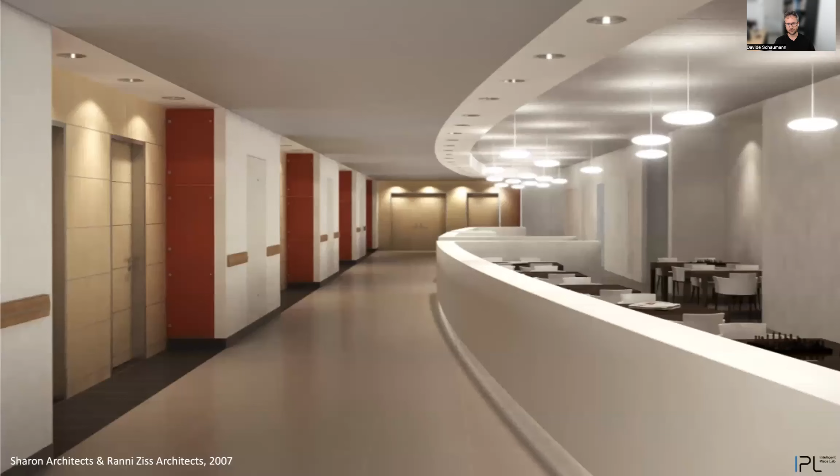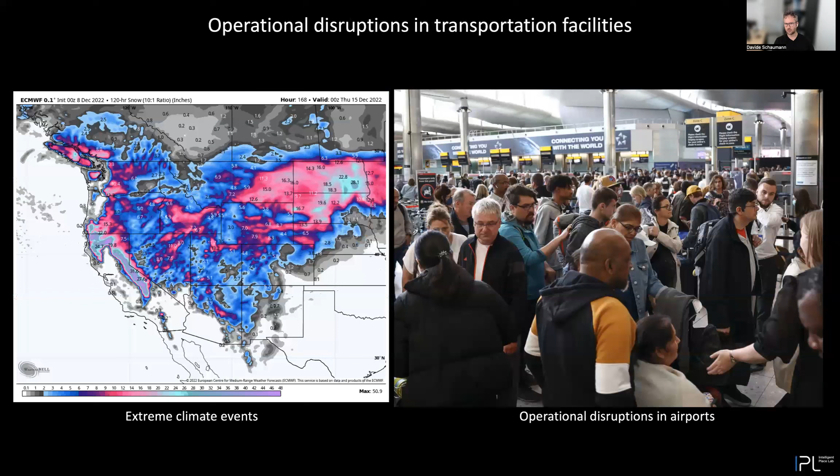This is not only pertinent to hospitals. In office spaces, for example, COVID created a fast transition towards work from everywhere. So it creates major occupancy fluctuation in offices, which are heavily underutilized at the moment. Extreme climate change events are also impacting buildings by creating operational disruptions, for example, in transportation facilities, such as airports. So the question I ask is, how can we design environments that meet ever-changing people's needs?

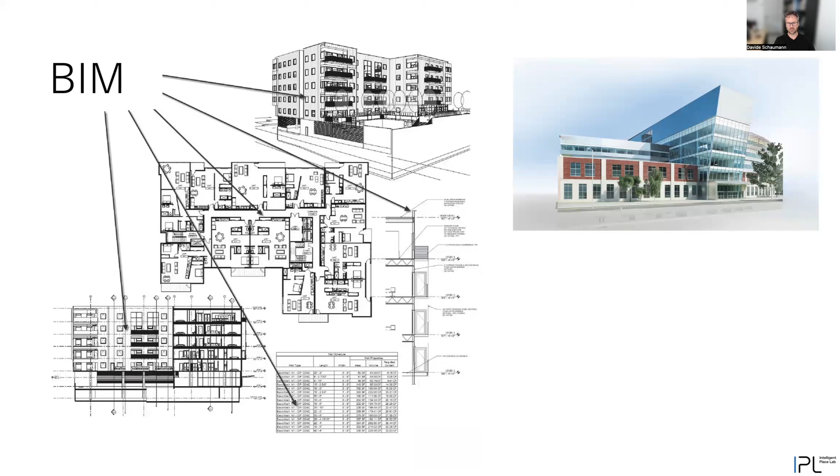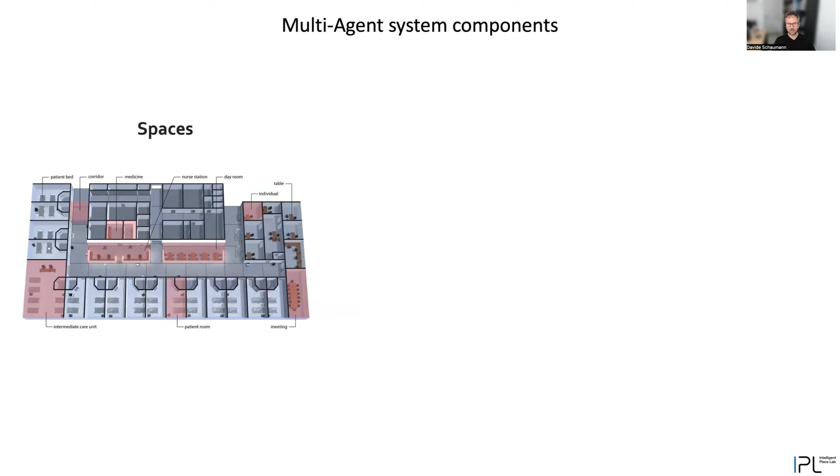Building information modeling is the go-to standard in representation in the architectural world. You have an integrated representation, which encompasses all the physical aspects of the building, but it is not representing the human in the building, the occupants. So what I advocate as a solution is to model not only the spaces, but also the people, the occupants, and the activities they do. Each one of these modeling domains comes from a different world of architecture, social science, and operational research, and industrial engineering.

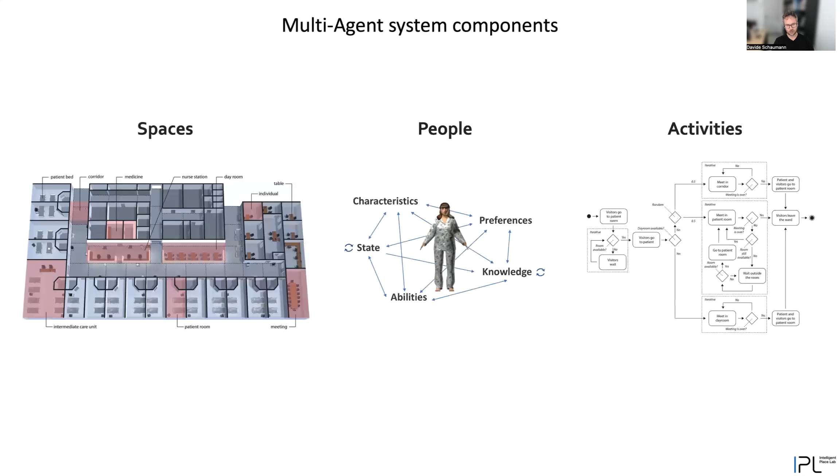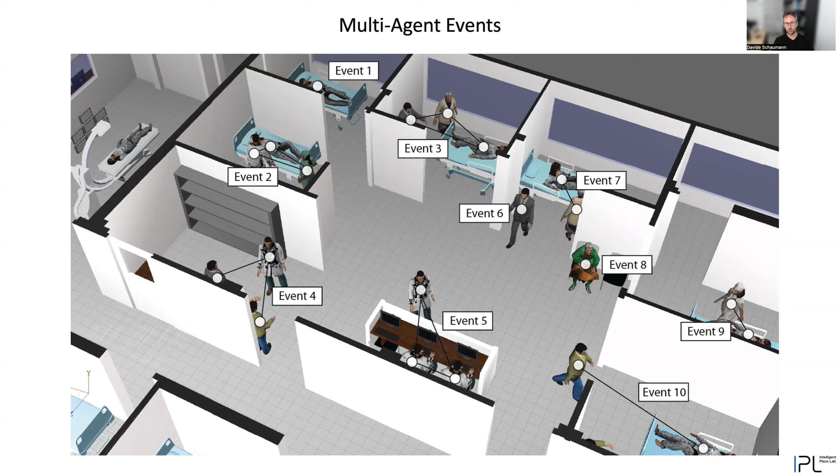So these worlds need to be combined to have an integrated representation of human behavior in built environments using a multi-agent system where each agent is able to interact with other agents and within a virtual environment to carry out their goals. So agents are participating in narratives according to their roles. Their narratives are a sequence of events that basically occur in a building, which represent their use scenarios. So these narratives can be simulated in a virtual world.

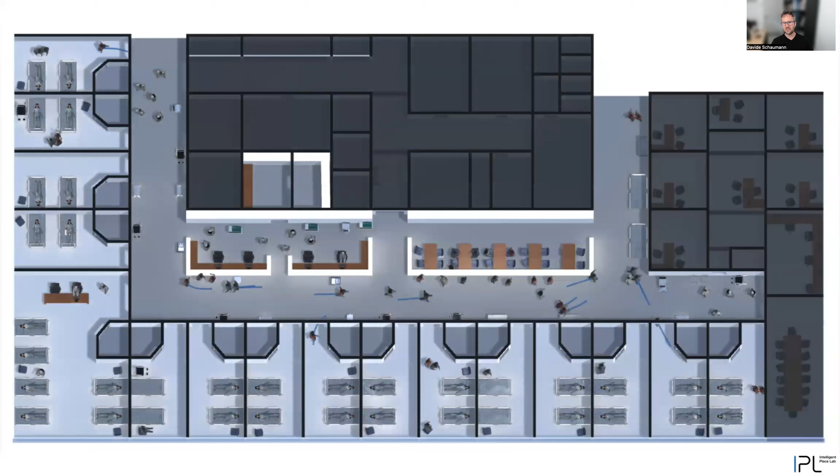For example, this is a hospital facility. You can see here that on the bottom right, you have doctors and nurses doing a scheduled patient check round, but also visitors may come in at random times. And you see here visitors coming in, but when the medical staff come in, the visitor needs to leave. So there are a lot of social situations and interactions which are accounted for in this simulation.

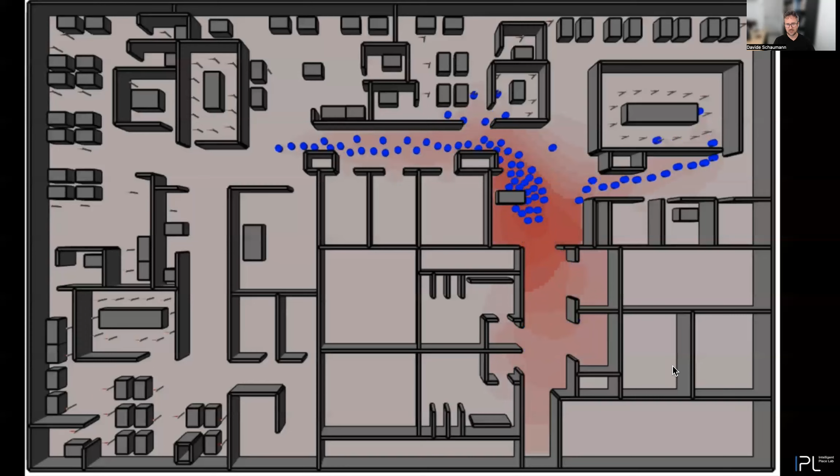Multi-agent simulation can also be coupled with other simulations, such as thermal simulation. So here you have a simulation of the heat in the building caused by the heat that the body generates. So you have a simulation of heat, a simulation of comfort of the occupants, and if the heat surpasses a limit, the occupants may decide to change their behavior, such as leave a room or turn on the HVAC system. So this is called co-simulation because you have a simulation of temperature, decision-making, comfort, and even the movement of people in the buildings.

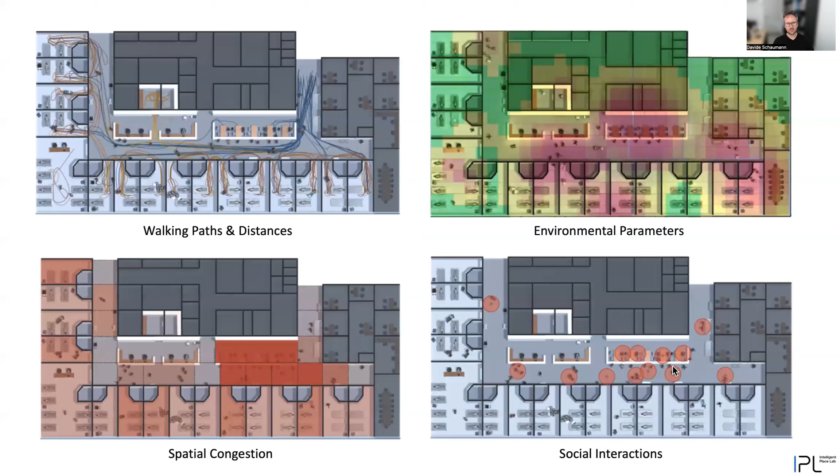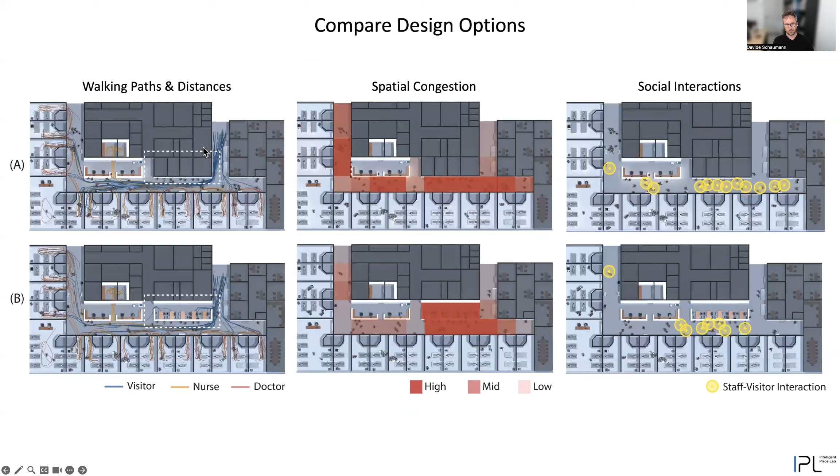So these types of tools can help optimize the building design. So at the design stage, architects can analyze walking paths and distances, environmental parameters, spatial congestion, social interaction, etc. And they can also compare design options. They can say, for example, in the bottom option, there is a day room for social interaction, which is not present in the upper option. So you can simulate the differences and see how this affects the behavior of the occupants. So far, we're focused on optimizing the building design.

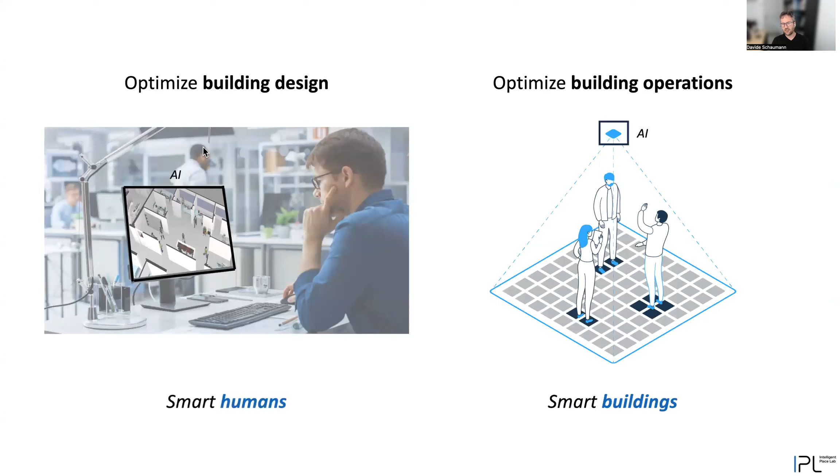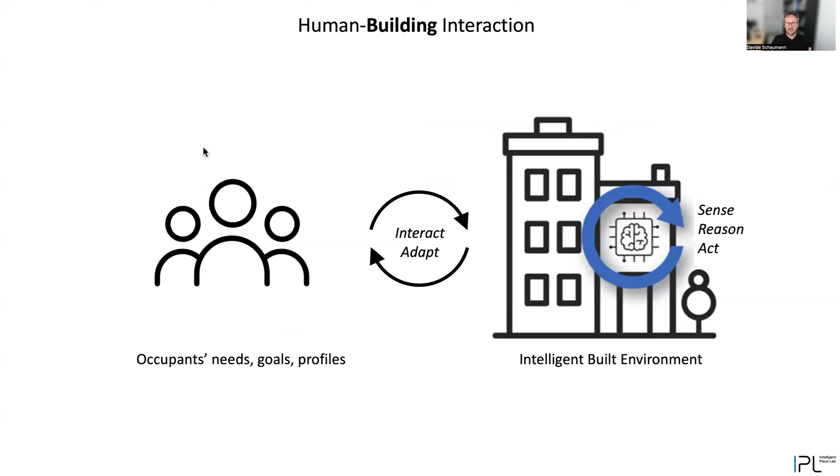So artificial intelligence is used to model synthetic agents that simulate the behavior of real agents. But these AI tools can also be incorporated into the building itself so that we can optimize building operation after a building is designed and in use. So in this case, on the left-hand side, we have smart humans that make decisions at the design phase. And on the right-hand side, we have smart buildings that optimize the operation of buildings. This is a paradigm shift in the field because buildings are becoming intelligent. They're able to sense, reason, act, and interact and adapt dynamically to the needs of the occupants.

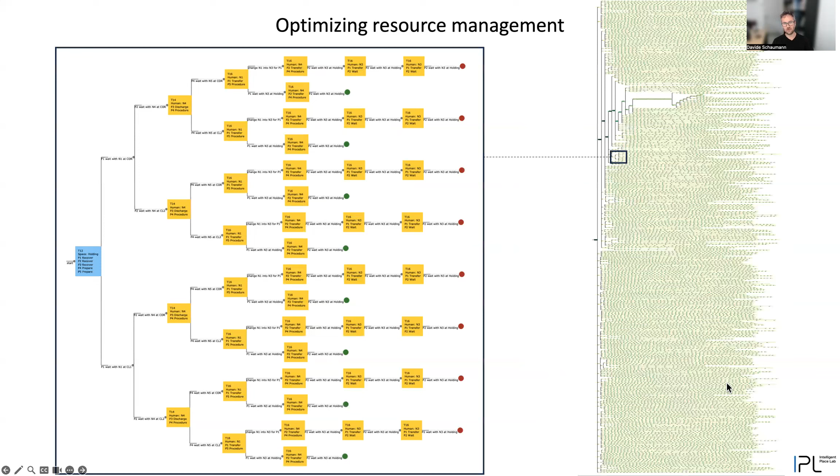So what can buildings do? They can, for example, simulate a different allocation of resources, such as building spaces, and optimize the way buildings are currently used so that you can optimize environmental factors, but also comfort and operational efficiency. This is a scenario where the building simulates future resource allocation scenarios. This is a sequential decision-making process because the moment you allocate resources in a position, you may create further conflicts in the future. So you need to simulate all kinds of options, up into the far future, to see if they do not create conflicts. This is an optimal resource allocation strategy, for example, but it's just an example because in reality, the building needs to simulate hundreds of thousands of options. This is a very complicated process.

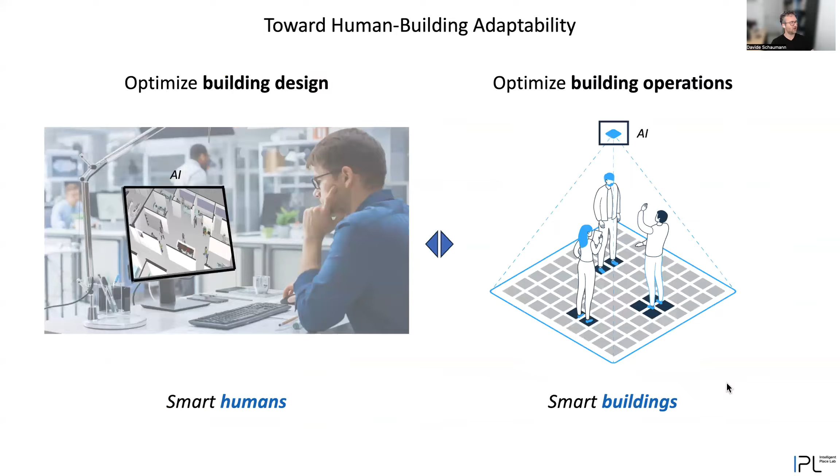So what I advocate in order to get towards human building convergence is to merge an approach of optimized building design made by smart humans with optimized building operation enabled by smart buildings. So in order to do so, we need three things: artificial intelligence systems to inform decision-making, integrated facility design and operation, and the convergent goal of improving social and environmental sustainability.